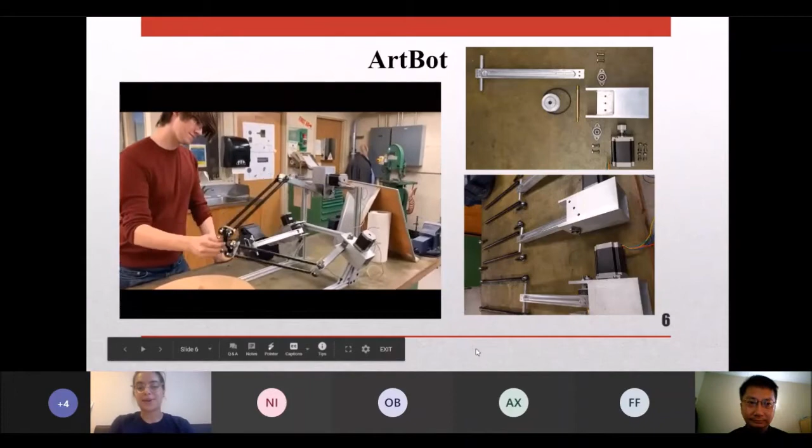Here you can see our Artbot lead, Aiden, holding the end effector and moving it around to show the range of motion that our robot is going to have.

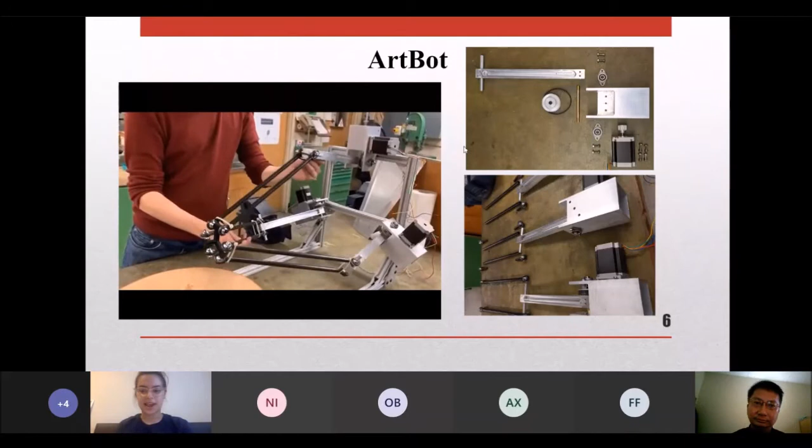You may be asking, what is this robot? Good question. As the name may suggest, Artbot is a robot focused on making art. Where our team lead's hand is, that's the end effector, and when the robot is complete we're going to have the end effector hold a paintbrush or a marker or some sort of art tool, depending on the medium. On the turntable you can see at the bottom of the screen, we'll be placing a canvas or paper or whatever the art is going to be placed on, drawn, or painted on. Of course this is a prototype, but the final product will be completely automated.

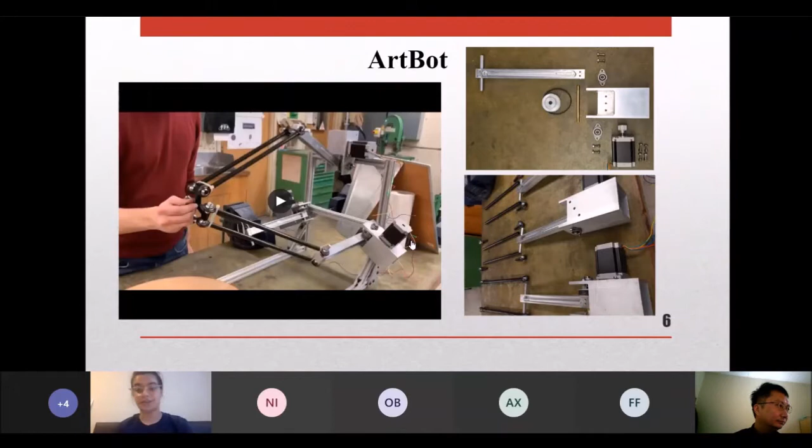And the end goal for the robot is that it will either create its own original art using machine learning algorithms or recreate existing art. And so the reason why we have these two genres is because our Artbot team will be entering the robot art competition, where they have multiple leagues.

All right, now we'll be moving on to the Pianobot project. Unlike the one we previously talked about, Pianobot isn't focused on a competition. It's a project that came out of the interest of some of our upper year Mechatronics students. As you can tell, this is a robot that's going to play piano. Their inspiration came from the Teotronica robot. Andrew, if you could play the clip of that, please.

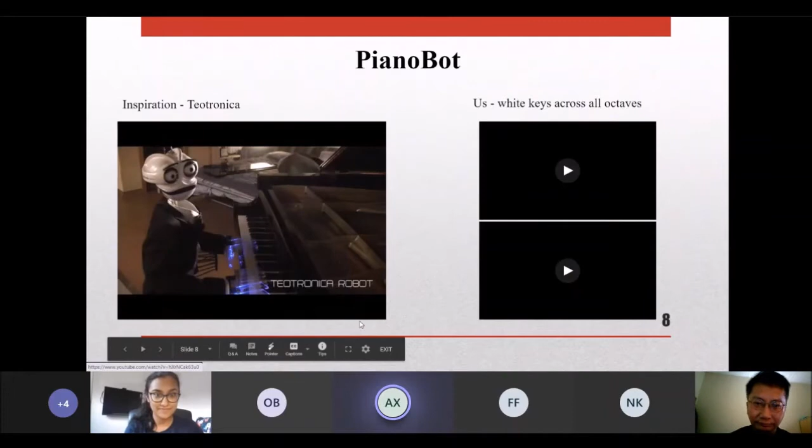If any of you are music enthusiasts, you'll know this is the Turkish March by Amadeus Mozart. While we aren't sure if we'll be able to get to that level for a while, since we're full-time students balancing many things on top of being on a design team, we do have some well fleshed-out goals. That's what makes Pianobot unique — despite not being a competition team, they knew exactly what they wanted in terms of technical requirements and what they wanted this robot to perform. Based on that, in the last two years they've been a team, they've been doing wonderfully.

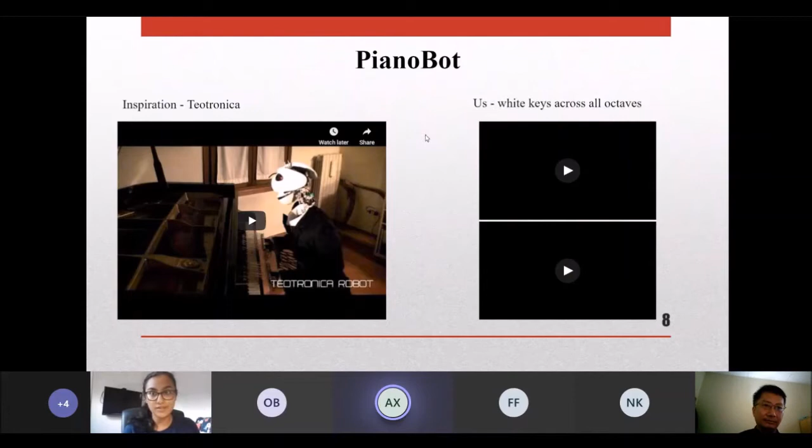If you start by playing the first video, you can see our robot can already play the white keys. It's Twinkle Twinkle.

Oh, could you turn the sound on? Oh, there you go.

Awesome, and if we play down below, you can see that it's also able to move all the way across the piano, hence being able to play all octaves.

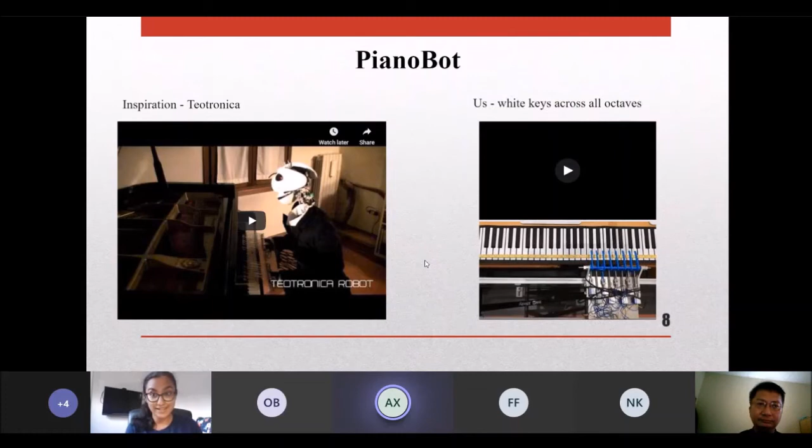Moving on to the next slide — currently this team is about 7 to 8 students, and one of the setbacks we're now facing is that, since most of this team is comprised of upper year Mechatronics students, a majority of them have just graduated during the pandemic and are going to be pursuing grad school, so they're not sure they'll be able to continue their commitment to the team. This means we need to make sure that during this turnover time we find people to take over their tasks. We're going to be doing an online recruitment cycle with UBC in September, so hopefully we can fill in those gaps. The photo on the left shows solenoids, which convert electrical current into linear mechanical movement, and that's how the robot is able to move its fingers up and down. On the right, you can see one of our dedicated members coding something for the robot.

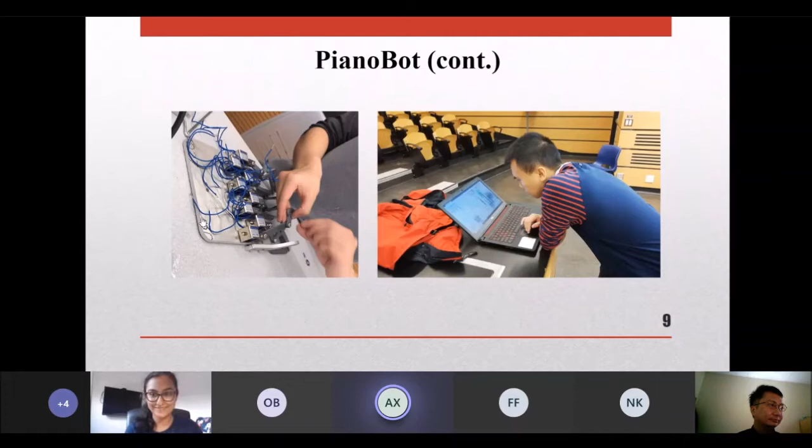Moving on to our last project, the RoboCup project. It's our flagship, and unlike the others, it's actually focused on two different competitions at the same time: the RoboCup at Home General Competition, the Open Platform League, and the RoboCup at Home Education League, which we actually qualified for and did phenomenally in this year.

A little bit about the structure: our RoboCup at Home team has a hardware component and a software component. The hardware teams are working to build a robot from scratch, including arms, drivetrain, and gripper. They have mechanical, electrical, and firmware subteams. For background, firmware is essentially the lower level coding associated with motor control, for example. So that's what the hardware teams are doing.

And what they do is once they have the low-level software and hardware done, they send all their work over to the software team, who is able to take those libraries and put them into ROS, and work with the machine learning and higher-level coding aspects of the team.

So we have not actually tried to compete in RoboCup at Home yet. We're hoping to do so next year. Because of the pandemic it's been a little hard, especially for machining, since we did have access to the laser cutter and water jet cutter at UBC, but unfortunately we're kind of locked out right now. So hopefully we can outsource that and still meet our project requirements on time, but we will see.

And then on the other end, we have RoboCup at Home Education. It's a smaller team, so they were able to acquire a Turtlebot only a few weeks before the pandemic started. It was really amazing what they were able to do in a short amount of time with their very strong machine learning skills. I'll leave it at that because we'll be hearing more about them through the rest of this talk.

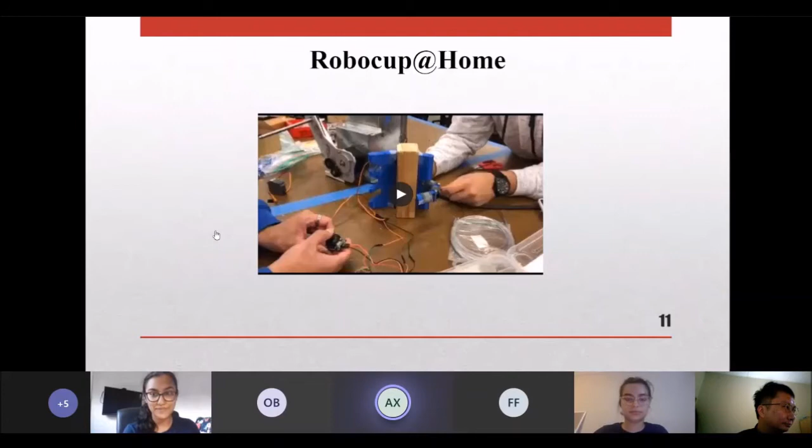On top of that, as I mentioned, we have hardware teams and software teams, and a couple different sub-teams. So how do we keep everyone on top of things, and make sure people know what to ask other teams? For example, if I'm on the gripper team and I need to ask a question about the wrist, I probably want to talk to arm, because that's where it's connecting to.

Next slide please. Awesome, so here is a little sneak peek at what the education team has done. You'll see more later on.

So a little bit more about the history of our team. Our team was founded in 2012 as actually part of a different team, and you may have heard of them - they're called UBC Thunderbots, and they participate in a soccer playing league for RoboCup. But a couple years later, they decided to branch off because we were really focused on RoboCup at Home. Things were going well until the primary administration team all graduated, and that's 2017.

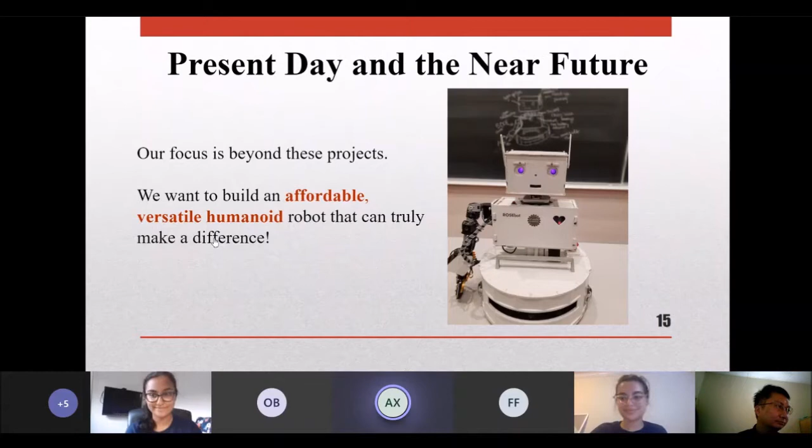Next up, I'd like to introduce the start of taking up a challenge as an engineer, our technical portion of the talk.

So here we're going to focus on the applications of engineering on our technical project, our RoboCup at Home project. So the first question we have is, what is an engineer?

As defined, an engineer is someone who works in the branch of science or technology, and they work with design, buildings, and the use of engines, machines, and structures.

You may be wondering, that kind of sounds a little bit like the work a scientist might do, and you're not wrong. A scientist is typically a person who is concerned with the theoretical aspect of the world in its entirety. Scientists do research that answers various questions about the world, and then engineers apply those theories to solve design problems or anything of that nature.

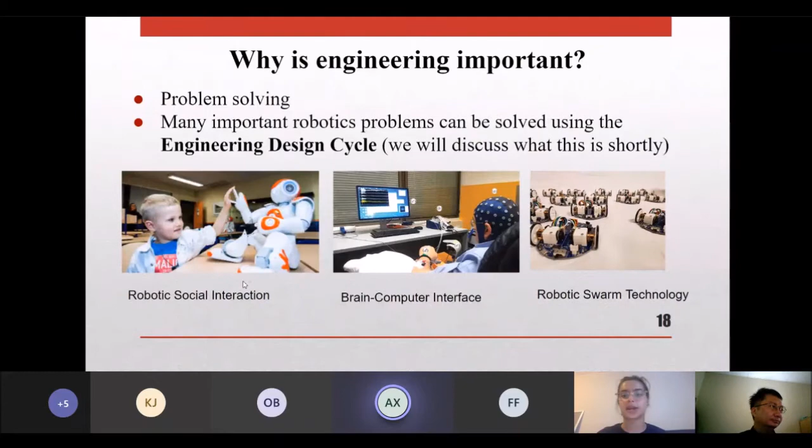Another question someone may have is: why are we using a formal design process like the engineering design cycle as opposed to a more intuitive process like trial and error? The formal process takes a lot less time most of the time, because with trial and error you implement a design and see whether or not it works. Most likely, by chance, it won't work, and you'll have to implement another design and repeat. This process can be very costly, both in terms of time, materials, and money.

We know that the formal design process has a lot less cost associated with it, and it's also lower risk, especially when dealing with projects that are very expensive or potentially dangerous. The formal design process is also very efficient, while trial and error or similar processes are typically quite inefficient due to their trial and error nature.

Because the formal design process follows a formal predefined layout, there are many opportunities for documentation in areas where you are required to justify your design. So in hindsight, when you have a completed design, you have many means by which you can fully justify why you picked that design and why it is superior, as opposed to just saying it worked, as you would in the trial and error method.

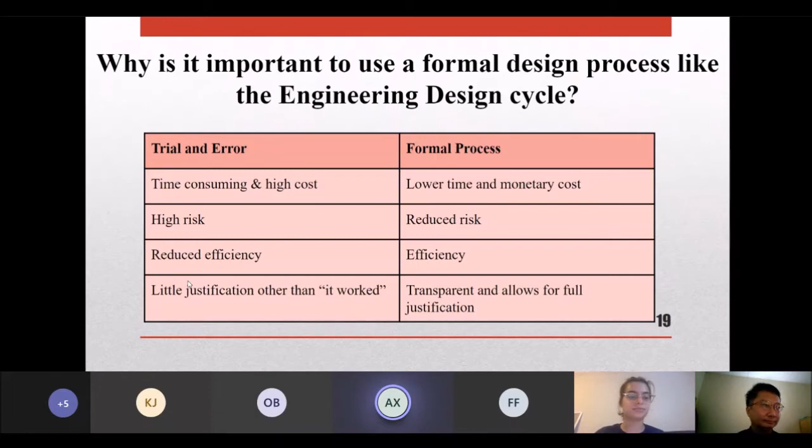So now we're going to learn a little bit about what the engineering design lifecycle actually is.

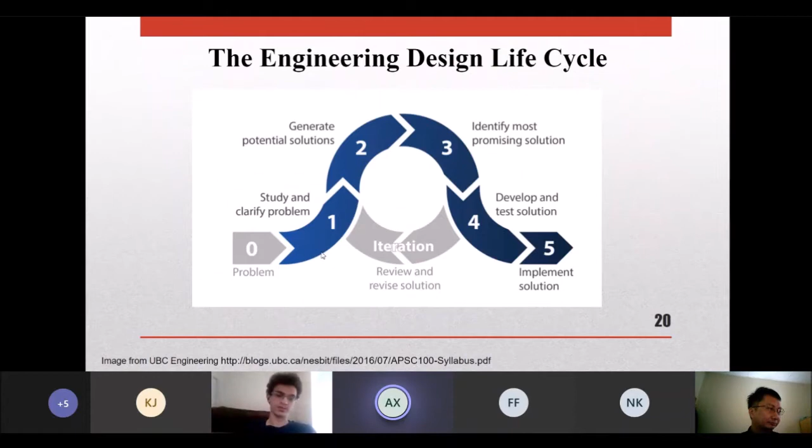On the next slide, we can see a different way of interpreting the cycle. Again, it's not quite a linear cycle. In the earlier stages of research, there's a lot of uncertainty. As you move on to generating concepts, the focus becomes more clear.

There's still quite a bit of uncertainty and iteration, but then finally, once you select the final concept, you go on in a very clear and focused method, and you finally finish with the final design or product.

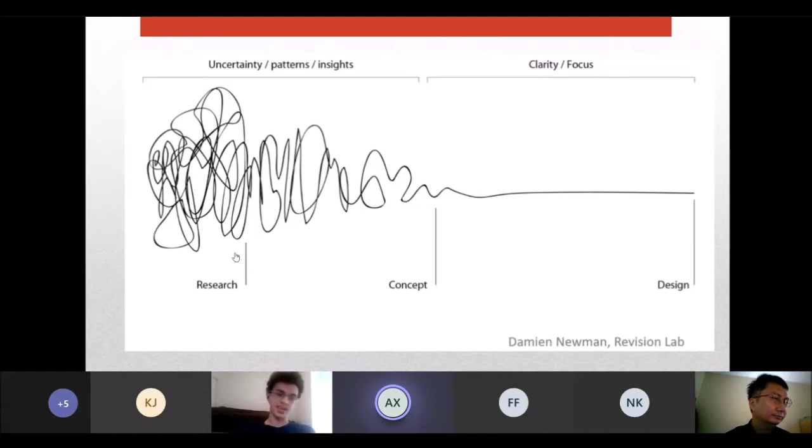A very important part of the design cycle, as you can see on the next slide, is stakeholders and needs. There is really no project without stakeholders, and essentially the whole point of a project is to address the stakeholders' needs. So just to define what a stakeholder is, it's anyone who's influenced by the project or who can influence the project.

The focus here is not just knowing who the stakeholders are, but rather knowing what their needs are. The needs in this sense are the requirements or expectations of the project by the stakeholders. That's essentially everything that the stakeholders expect us as developers to give them.

It's also important to note, as a final note, that stakeholders can share the same needs, but can also have contradictory values. So it's important to be able to balance everything and compromise.

First of all, of course, the design team members. That includes everyone on the software team, everyone on the Robotics team, and so on. There's obviously the RoboCup at Home committee and the community of RoboCup at Home, our sponsors, and finally the engineering design team committee, which is part of our university.

The idea here is not to satisfy everything. You can't quite satisfy all the needs. We just have to focus on the key needs that most of the stakeholders share, and we have to satisfy as many needs as possible while still leaving some room for compromise in case of contradicting needs or needs that we are not able to accomplish.

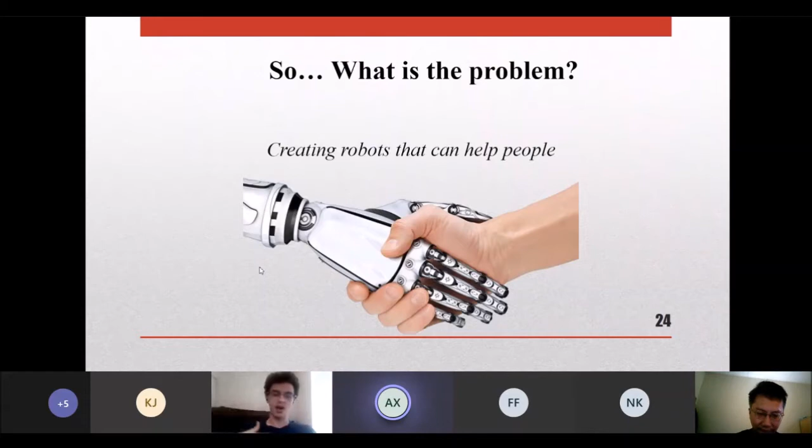After we identify the problems, we next study the problem. We need to learn more about the problem and why we're addressing it and how to address it. These are some of the key things we follow to study the problem in our case.

One of the most useful and probably entertaining ways to study our problem is watching previous competition videos. It's quite useful sometimes to learn from other people's mistakes rather than your own. Watching previous videos was very useful to give us an insight into what we're going into.

Another thing which may seem quite obvious but is often overlooked is the rulebook itself. The rulebook centralizes everything we need to know about the competition, the different challenges, the rules, and so on. So it's definitely probably the most valuable resource in our case.

Obviously, there's also reviewing related research, so that could be research into human-robot interaction and machine learning and so on. And finally, communicating with the committee, which has proven to be very useful in our case, as they are obviously our main stakeholders. So keeping good communication and continuously asking questions has proved to be a very valuable resource.

So next up, I'm going to go to the next stage of the design cycle: generating potential solutions. As you can see on the following slide, there is something we call a solution space. A solution space is essentially a way to represent how we generate solutions.

We should also note that, even though we've explained the number of recognizable commands and the accuracy separately, they might be a little bit correlated, as our corpus grows, sometimes accuracy could be worse. But they are not on the same graph, as this way we can objectively measure each of these specific metrics in comparison to each other.

Some other examples include other shapes of graphs in satisfaction that we may see. For example, in the RoboCup at Home rulebook, in obstacle navigation, if there are any damaged objects, you won't get any points for that. So you can't have any damaged objects, therefore our satisfaction drops to 0 immediately if anything is damaged.

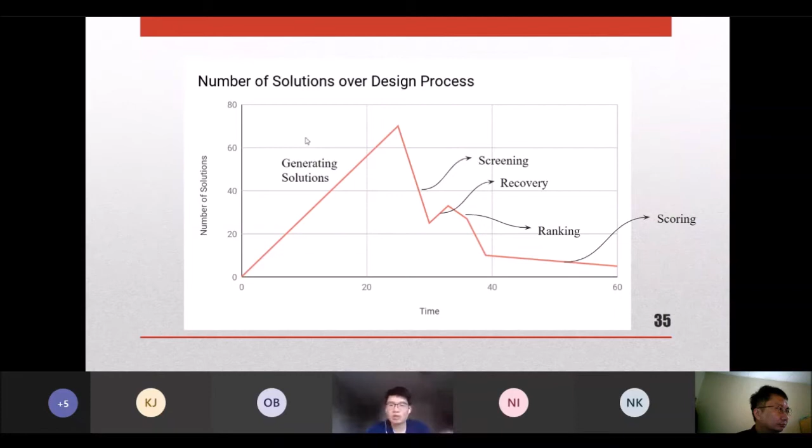And again, this process you can repeat more than once depending on your situation, and there will be many chances to iterate along the way.

Finally, from our project, to assess the facial recognition, as mentioned from the previous step, we used a few strategies. Even though we still fell a little bit into the trap of trial and error, we also consulted our mentors who have many years of computer vision experience, having performed similar projects. We'd like to thank them because they were a great resource for our insight. They also had experience with all the different proposed methods mentioned earlier and a clear idea of which one is best based on the context.

And lastly, it was very useful to review the research available online, especially one that compares the different methods and highlights the advantages of each. In addition, we reviewed previous description papers by teams that have already attended the competition.

So we move on to the next step after we identify the most potential solutions, which is to develop and test these solutions.

The fourth stage in the engineering design process is developing and testing the solution. By this point, we have already generated and identified promising solutions, and now we need to develop this solution while keeping in mind that the goal is to minimize overall risk. This can generally be done by the use of prototypes.

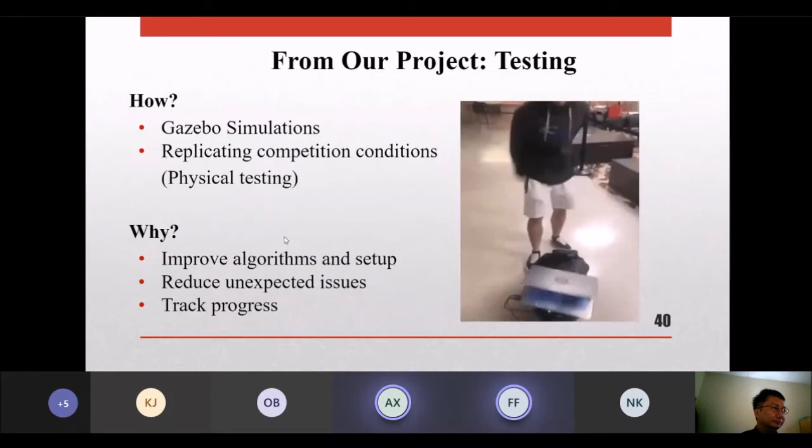Once features are tested, we can iterate on our algorithms to improve performance as well as smooth integration between different modules and features. Additionally, we test hardware under competition-like conditions, such as attempting the competition tasks themselves, which reduces any unexpected issues we would face in the future and allows us a reasonable estimate of our progress.

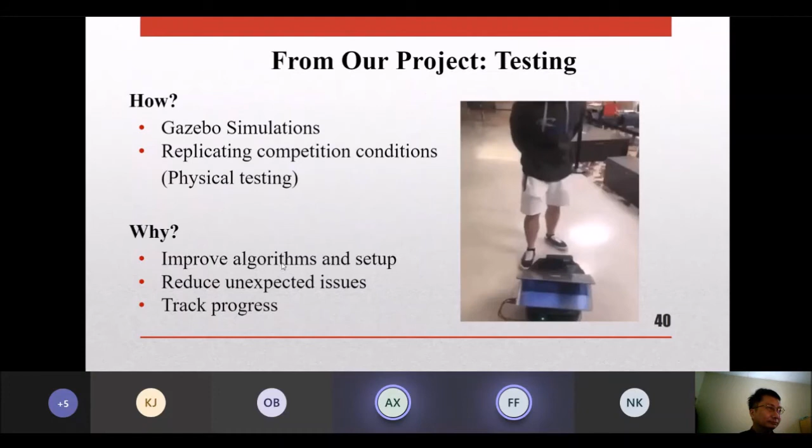Finally, the last stage is implementation. At this point, we have thoroughly thought of ideas, identified appropriate ones, and tested them with prototypes. Now we move on to the actual final implementation, which is the culmination of the entire engineering design cycle.

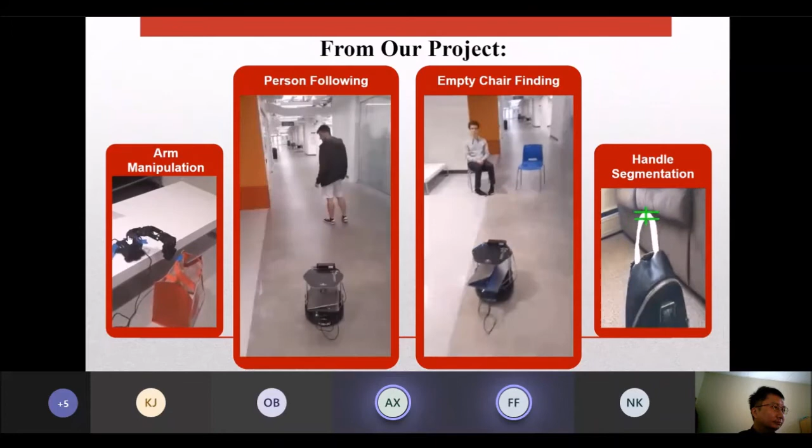Implementations can be very diverse depending on the field. In this case, we have different aspects of our specific project and how the engineering design cycle led to these specific accomplishments. By following the engineering design cycle, we were able to effectively reach several key milestones in the development of the final robot, which we see here.

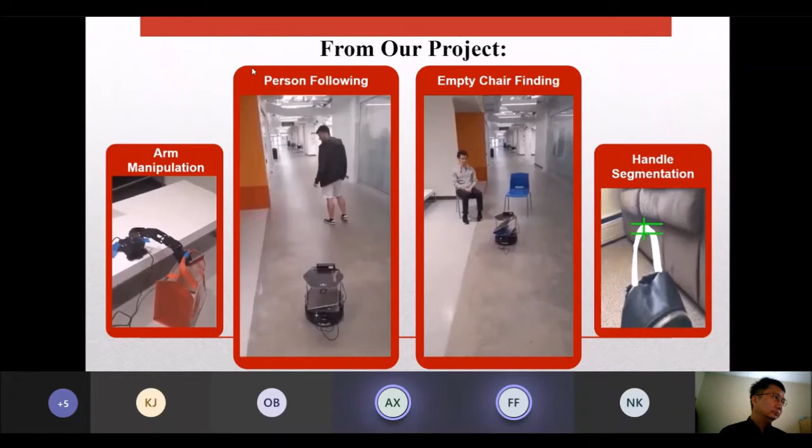We have tests of arm manipulation for the help-me-carry task, for instance. We have person following, as well as empty chair detection, and also handle segmentation. One thing not included is speech recognition, which also plays a big part, but we can't really show that through GIFs. Now, I'm not sure if the GIFs have been running for you guys.

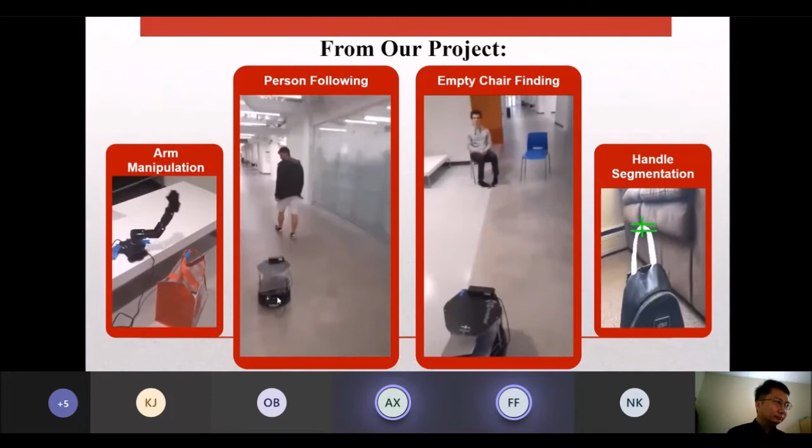That concludes the engineering design cycle. Now we move on to project management. Thank you for that introduction, Francisco.

The reason we're discussing project management is for one key reason. You now know how to go through the engineering design cycle, but having a technical background isn't enough. You could be super knowledgeable in the technical side of things, and what that ends up doing is your ideas go wild. You're thinking all over the place because research is emerging, especially in robotics and machine learning—there are papers coming out every single day. If you stay in the engineering design cycle too long, you're not really going to make progress on finishing a project. That's why you need project managers to keep you grounded and make sure you're sticking to deadlines.

Another reason is that funding for a lot of companies or research places comes from being able to show their deliverables at a certain date, or for competition requirements. If you don't have something done by October, maybe you can't qualify for the upcoming RoboCup competition. So we're going to discuss two key methodologies in software that we use for our team as well, at least a modified approach.